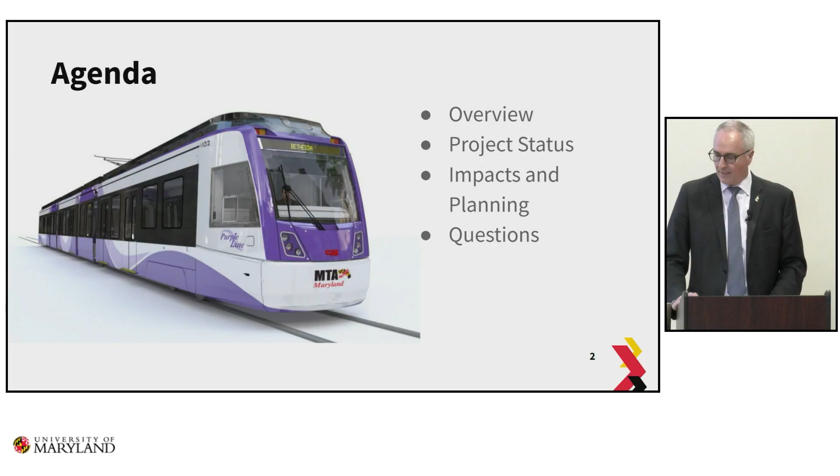Our agenda is going to provide a brief overview. I know many of you are versed in the Purple Line, but I don't want to take anything for granted, so we'll provide an overview, and then talk about the project status that's underway, and importantly, the impacts and the planning around that. And then, as I said, we'll leave time for questions.

So, in a nutshell, what is the Purple Line? It's a 16-mile light rail train system that will connect from New Carrollton on the eastern side of the 16-mile transit corridor through College Park, through Silver Spring, to Bethesda. It's going to be operated by the Maryland Transit Administration, and the system is scheduled to be operational for service in the fall of '26.

Light rail projects like this, often the construction is finished sometime in advance to allow all the training and testing that goes on. So hopefully the construction, the major construction at least, will be finished—we'll get into some of that detail later in the presentation—but hopefully the major construction you'll see on the main campus will be finished sooner than that.

The project started in 2017, and because of some disputes between the contractor and MTA, COVID, and other issues, the project was delayed a bit, but now, as you can see if you walked into this building, it's back on track. See what I did there with 'on track'? And the MTA is optimistic about its completion for service in '26.

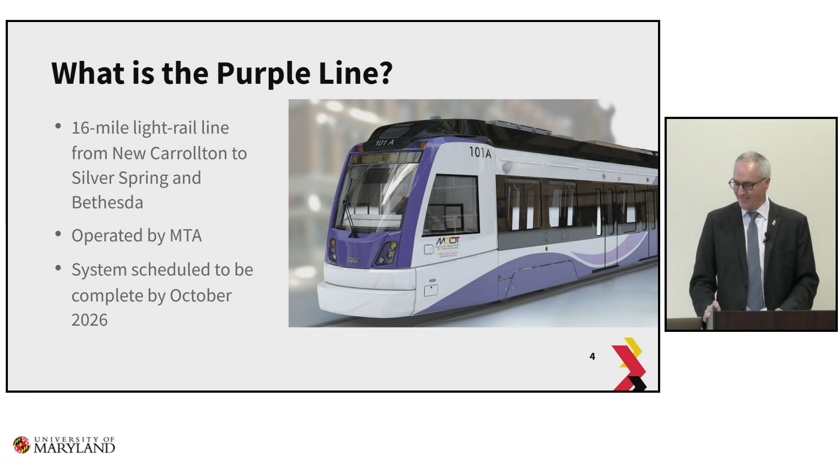You can see behind me an example. For those of you who've not had the pleasure of being in cities that have light rail, this is some video from Portland State University, where light rail has been in service for a number of years. Light rail is very quiet.

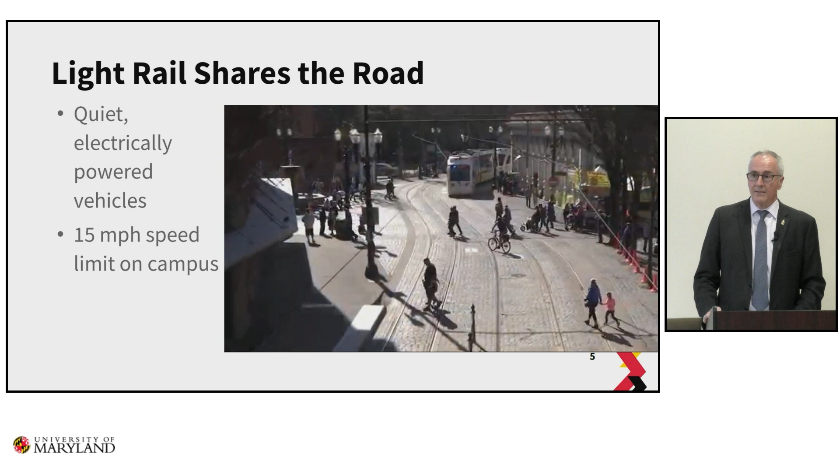Maybe not quite as quiet as this video, but pretty quiet. And they're electrically powered—as you can see, there's a catenary above the light rail itself. So unlike the metro system, which is a heavy rail system with a third rail next to the tracks, this is powered overhead. Through our campus, the speed will be limited to 15 miles an hour.

One of the things we worked through with MTA years ago was to minimize both vibration and electromagnetic interference that comes from large masses of steel moving through space. If you keep the speed down, that reduces the vibration and electromagnetic interference, and it also adds to the safety. You can see in the image that the rail in this location is embedded in the roadway itself, and that's the same condition you'll see on our campus.

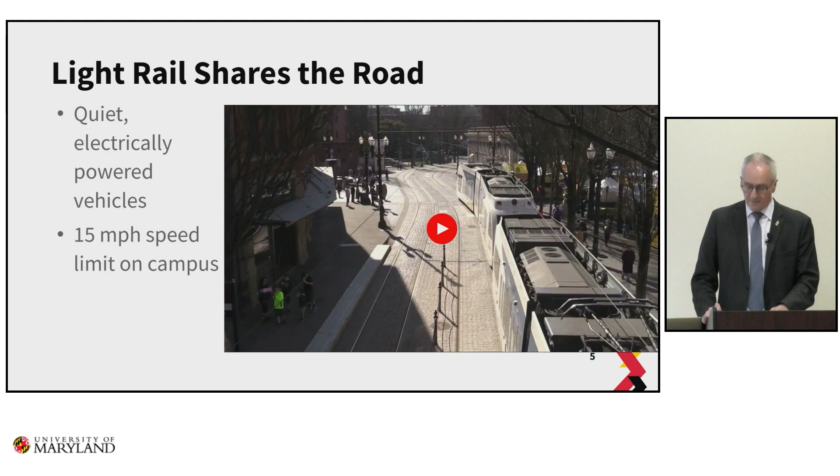There are, I believe, as many as 40 systems in the United States identified as light rail systems. You've got a few images here of some that are in operation.

On your left-hand side is the Tucson Sun Link that serves the University of Arizona and the Banner University Medical Center. Portland we saw just a few minutes ago up in the upper right-hand side. And at Minnesota, the Minneapolis-St. Paul light rail runs through the University of Minnesota's East Bank campus. So all of these are in fairly dense, urbanized areas.

Let me ask a show of hands. Has anybody been to Washington, D.C., H Street corridor to see the light rail there? Anybody else? Yeah, so our train is a little bit longer than that, but it's a similar looking train.

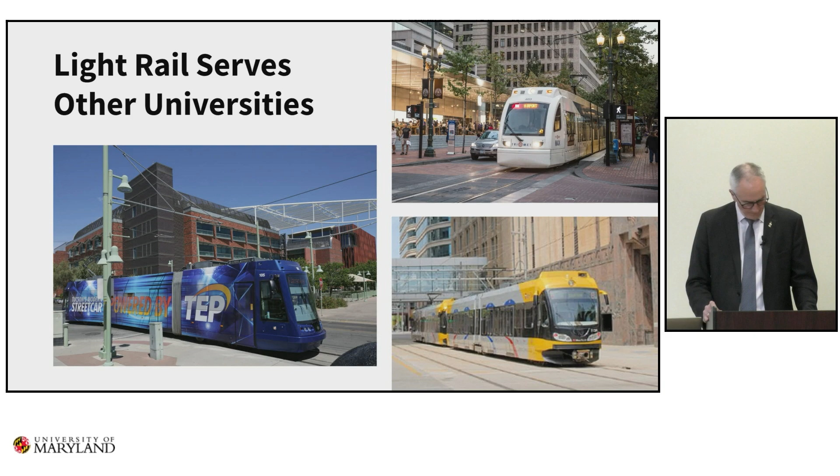When constructed and operational, there's an incredible amount of connectivity that we will have among public train transportation through our region. We're already very well situated as the flagship university within the Washington, D.C. Beltway, and we have pretty good access to the College Park Metro Station. You can see here an amalgamated image where you'll recognize parts of it from the WMATA heavy rail system with the red line that makes a U shape, and then the green and yellow line that goes through College Park, and off to your right-hand side, the orange line.

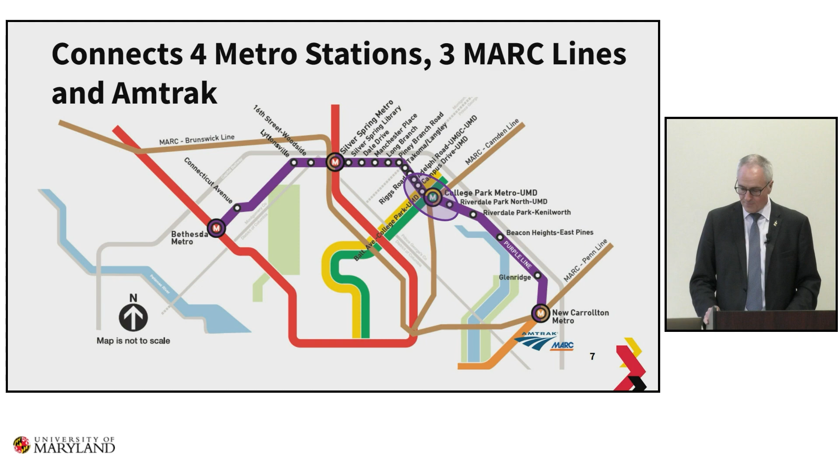The purple line will connect from east to west, 16 miles, 21 stations, and you can then easily get to all 5 of those lines directly from campus. Additionally, there are 3 commuter rail lines connected here that you can see in brown. And then finally, Amtrak. The Northeast Corridor is served by Amtrak through New Carrollton. So the ability to easily jump on the light rail, purple line, and get to other major modes of rail transportation is going to be tremendous.

As you traverse to the right, heading east, just outside this building in front of the Driscoll Center will be the next station. Then at the intersection of Baltimore Avenue and Rossborough Lane, near Ritchie Coliseum, will be the 3rd station. The 4th station is coincident with the College Park Metro Station. And finally, at the eastern edge of our Discovery District in Riverdale Park is the 5th station.

So this is a tremendous amount of easy access between these 5 stations. One of the things we were able to work out with MTA years ago is for anyone affiliated with the University of Maryland community to ride among those 5 stations fare-free. This is going to be tremendously beneficial to our entire community, particularly as we continue to develop areas to the east in the Discovery District.

People ask, well, why is the light rail right through the middle of the campus? The simple answer is that a great number of alignments were explored for many, many years, and the best practice for transportation is to put the transportation where the people are. Most of our folks are right here through the middle of the campus. You can see on this image some of the many major buildings along the alignment of the purple line that will be well served.

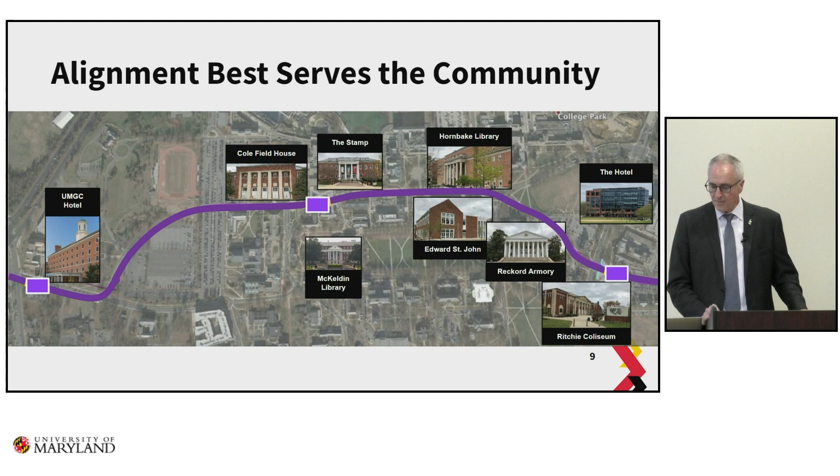Now we're drilling down on the 3 stations between Baltimore Avenue and Adelphi Road. This is the path that serves the community the best.

I mentioned a little bit already about some of the benefits of the light rail system, the free rides. While the Purple Line is being constructed, we also worked with MTA to add a bikeway, a two-direction bikeway, 10-foot wide, on the south side of the Purple Line between Adelphi Road and Baltimore Avenue. Many of you who like to bike, some of you may like to scooter, will realize that our bike infrastructure on campus is not where we would like it to be. When the Purple Line is constructed, as part of the construction effort, this nearly 1.2-mile bikeway east to west will provide a major bike and scooter pathway that will be separated from sidewalks and separated from roadways.

So this will be a dedicated bikeway.

I mentioned the access to the campus from the surrounding areas being greatly enhanced by the Purple Line when it's operational, as well as being able to support the continued redevelopment in and around the College Park area.

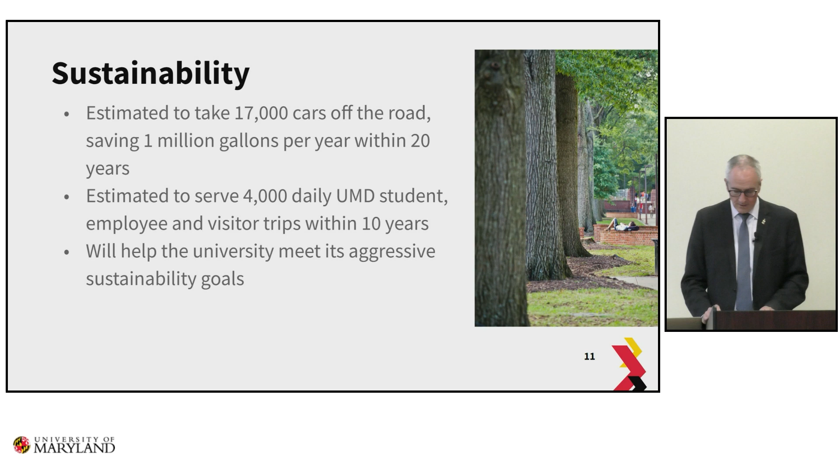Sustainability is, of course, very important to the university community, and the light rail, when completed, is estimated to take 17,000 cars off the roadways, saving 1 million gallons of fuel every year within the first 20 years of operation. What it means to the university campus is about 4,000 daily UMD student, employee, and visitor trips. This is just part of our sustainability efforts to reduce our impact. Transportation is a major contributor to greenhouse gas emissions, and having light rail will enable us to make significant progress at reducing that impact.

The vehicles themselves are very sleek. They're actually fabricated and sitting in Elmira, New York, maybe a year away from the first of those vehicles making its way to the test area, not far from the campus. They are a single vehicle, 140 feet in length, and you can see the accordion strips connecting the 5 sections of the vehicle. That's called articulated, and that articulation enables the long vehicle to navigate turns and deal with grade changes.

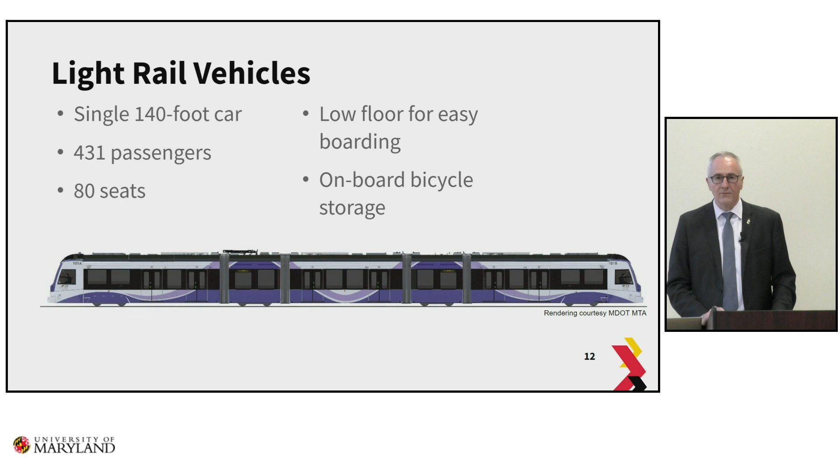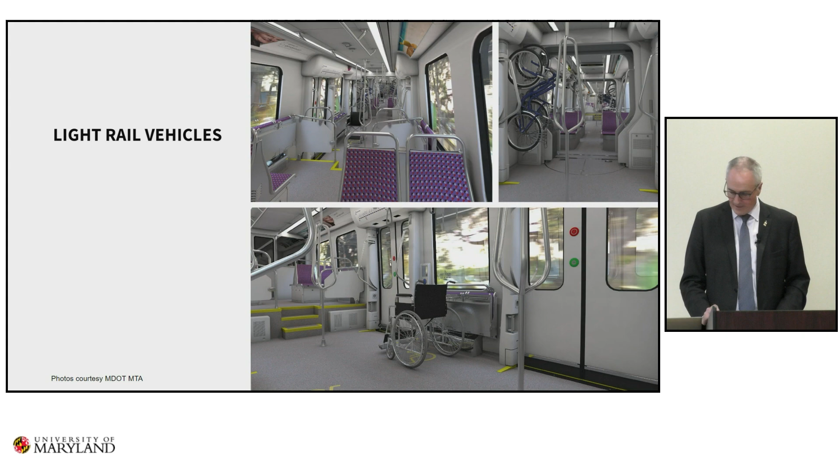The capacity on board is 431, including 80 seats. It's a very modern train. For those who've seen older style light rail, rest assured this is a very contemporary train design with low floor for easy boarding. You'll see in the next image on-vehicle bike storage and easy access for those in wheelchairs. So very modern, clean, I'd say very attractive train.

Additionally, we're going to have public art at each of the light rail stations across the 21 stations, including the 5 near campus. The Purple Line has an Art-in-Transit program, which I really applaud, that resulted in a series of unique art installations at each of the stations.

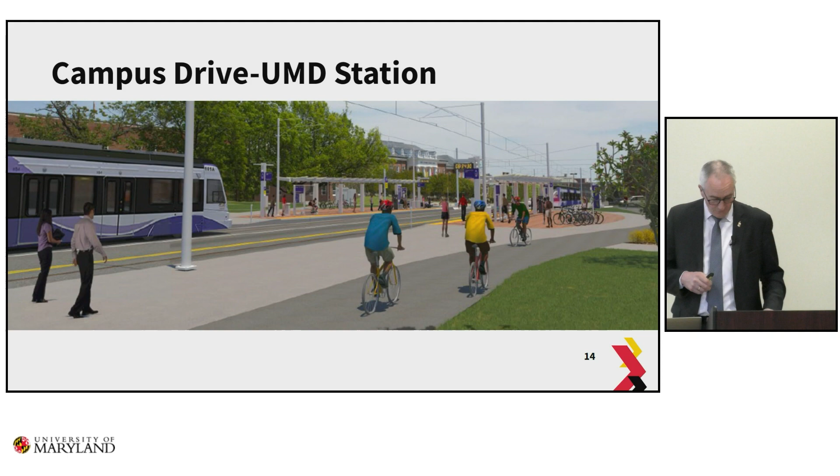Here's the bikeway that I described, and you can see the shelters for the station here in the center of the campus. The shelter itself is very clean and easy to see through. On the next page, I'll show you some of the images of each of the stations on those 5 locations I've been talking about.

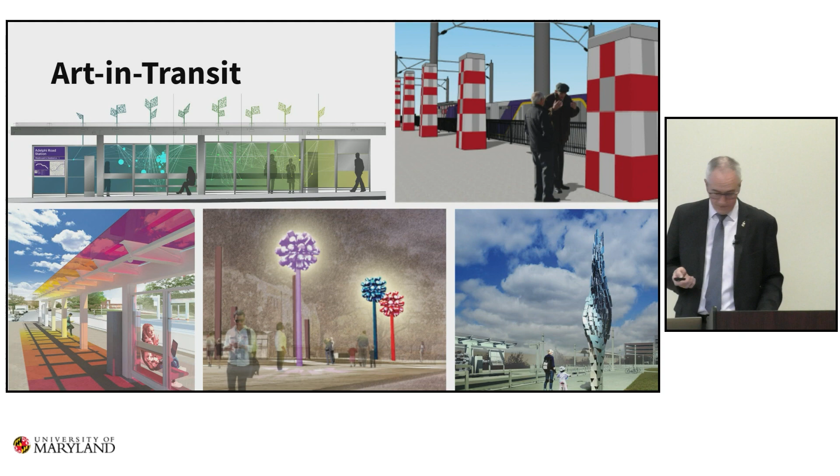Regarding status, I mentioned a little bit, but I'll go into a little more detail. The project got started some years ago, but really it was utility relocations and modest amounts of work. Things started in earnest again over this past winter break, and as you can see now, the contractor, MTS, is fully mobilized and well underway.

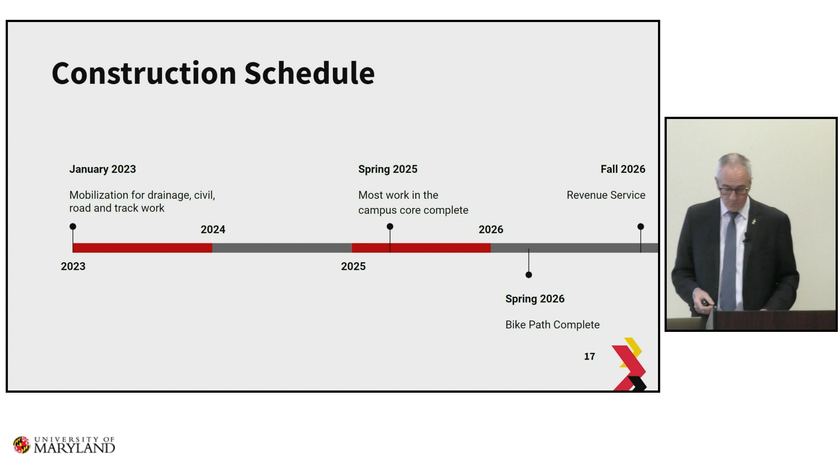Things will be working pretty heavy. I'll get into some details in just a second, but most of the work in the campus core is projected to be complete by spring of 25. We're working with MTA to try and even improve upon that schedule. The bikeway I mentioned will finish shortly thereafter, and then revenue service, the term used when it's available to the public, is scheduled for fall of 26.

So managing the impacts during construction is a significant responsibility, and we've been working at it very hard for a number of years. In addition to working very closely with MTA and the contractors, we have created two leadership groups. These were created years ago, one that I chair and one that Courtney Brown chairs.

The one that I chair we dubbed the Purple Line Executive Oversight Group, and that's the group that at a high level oversees the construction and works to minimize the impact on campus operations. They're also a key group that shares concerns from the community, which they hear from different quarters.

Courtney's group, the Purple Line Work Group, is about 30 stakeholders spread across the campus, and they deal with lots of the nuts and bolts, day-to-day operational issues.

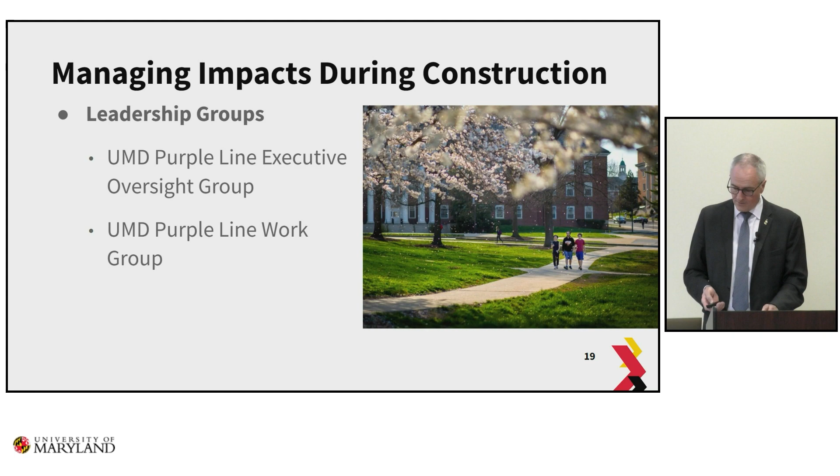Campus Drive is one way from Regents, the north-south road here, through to in front of Cole Fieldhouse. It's been in a one-way condition for some time now. What's changed recently is this stretch of roadway between Union Lane and in front of Cole is one way, and between that location and the Lot 1, Lot Z parking lot, it's closed. We're trying to balance minimizing the impact to the campus while allowing the contractor lots of work areas so they can progress the work as fast as they can. This is the condition that will continue through the rest of this spring semester.

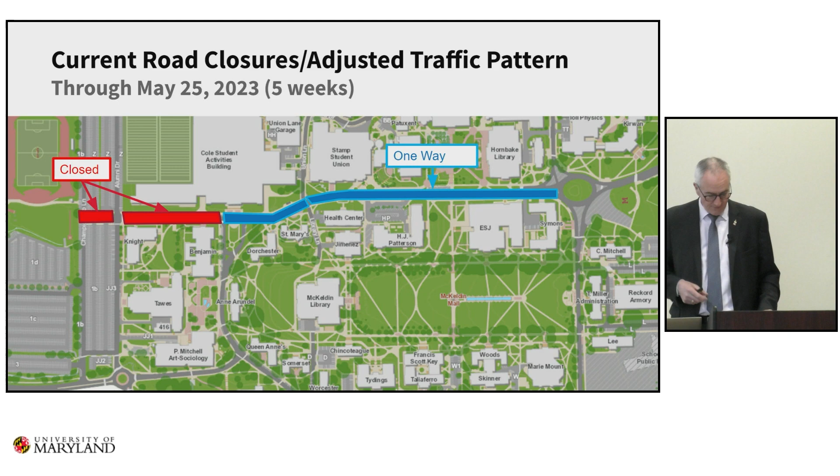Part of that was to reconfigure the intersection at the traffic circle. Just to orient you a little bit — Toll Physics is here, Hornbake Library, the Geology Building, Symons Hall. So the former traffic circle at Campus Drive and Regents Drive has been reconfigured with a series of stop signs to allow the work to go on, because the Purple Line itself will come right through, and I'll show you an image of that in just a little bit. We've had to do these detours to allow the work to continue, and it should be in this condition until about September of this year.

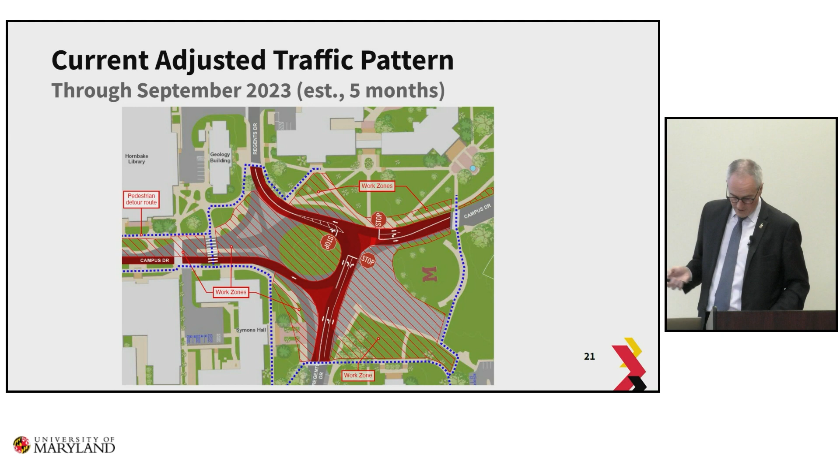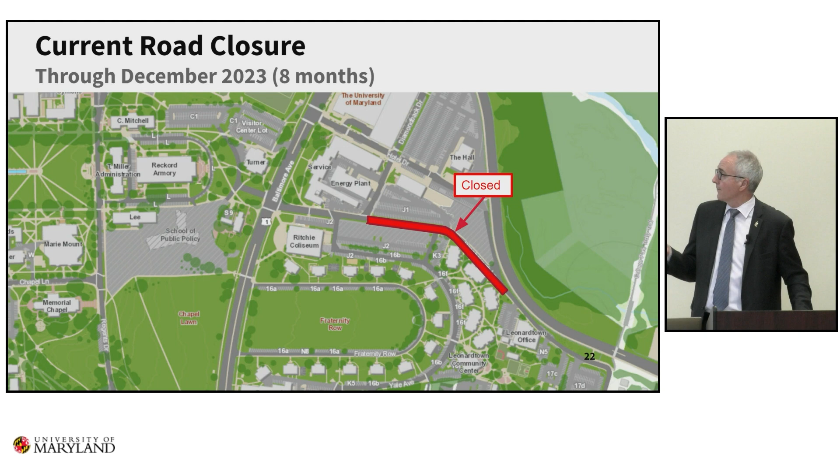Then through the rest of the calendar year on the east side of campus — I don't know how many of you spend time over there now — near the hotel and Ritchie Coliseum, the section of Rossborough Lane adjacent to the new Leonardtown community is closed. Ultimately, the Purple Line will make its way across Rossborough Lane and connect to Campus Drive, continuing toward the College Park Metro. So this is another 8 months in this condition.

When we return after summer, hopefully soon after, this intersection—I apologize we don't have the same graphic image underlying this—but this is the Campus Drive, Regents Drive intersection. This is where the traffic circle used to be, and here is where the landscaped M currently exists.

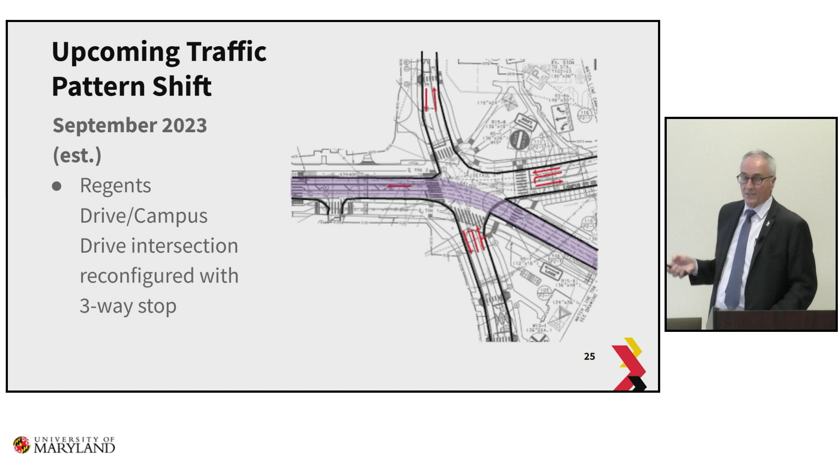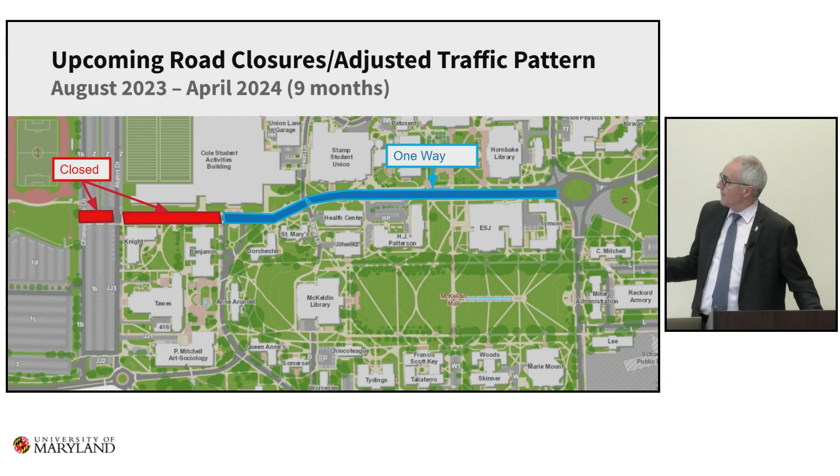And then in the fall, we'll be back essentially in the core of the campus in the same condition as today, with one-way traffic from Regents—this will have been improved through—and then this section remaining closed.

In January, now I'm going to flip back over to the eastern edge. You may recall that we had closed this section—this section of Rossborough Lane is closed right now for construction. As they finish that up, construction will move into this section.

What will happen here is there's a period of about 11 months where access through Rossborough Lane is not going to be permitted. We have designed and will have constructed a connection between Lot C1, near the old visitor center, to allow moving around this intersection without going through Rossborough Lane.

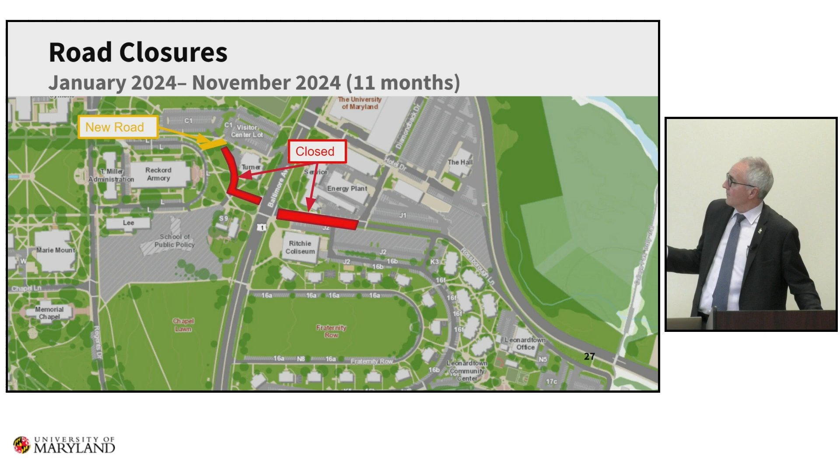So the section right behind Turner and between Ritchie and the service building will be closed for that 11-month period of time.

All right, so a lot to sort of work around. I'm going to talk a little bit about the sidewalk closures, which I'm sure everybody in this room has probably already experienced.

Just a couple of points: we work very hard to make sure that all of the detours are ADA accessible, and we develop work plans with the contractor that are reviewed with our friends in the accessibility office. But in addition to planning this work, construction is a dynamic activity, so there's a group of folks who monitor on a regular basis to make sure that what we think is an accessible and well-marked pathway remains that way through construction.

Later on, I'm going to point you to an email and websites where, if you were to learn that something is not how it should be, let us know and we'll get on that right away. We do take this very, very seriously. We work very hard to provide good signage, good notice, and stay on it day to day to make sure it stays that way.

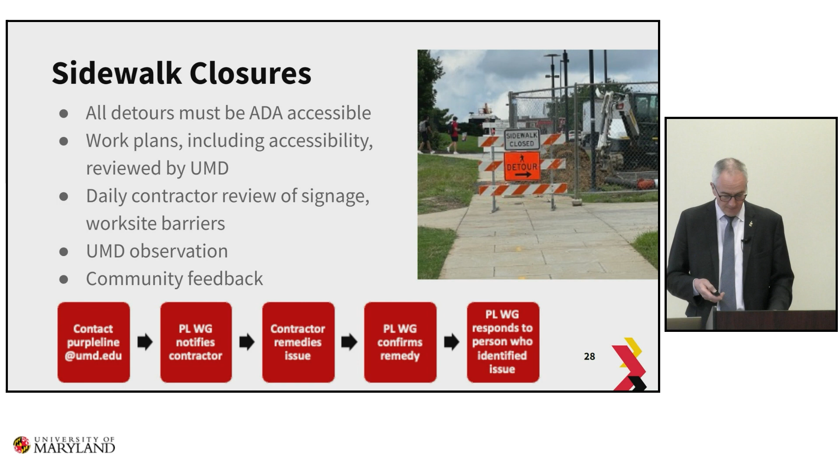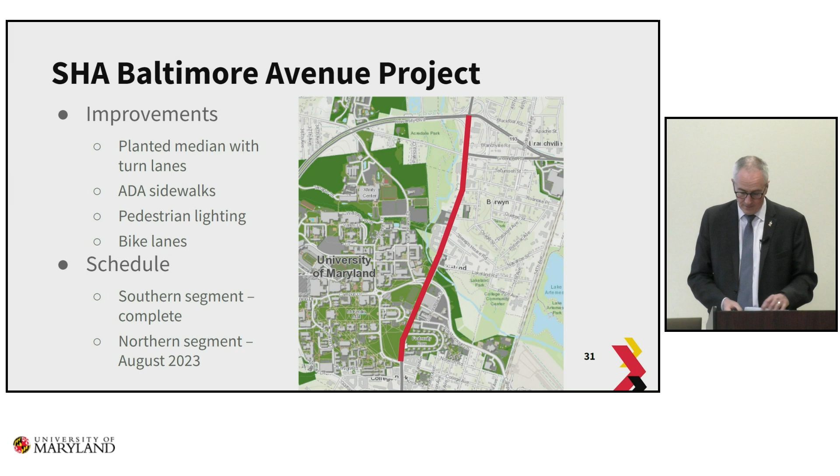State Highway is indicating at this point that the scheduled completion is in August of 2023. If you ride around that roadway, you probably think that's ambitious, and I would agree with you. So we're working with State Highway and our friends at Maryland Department of Transportation to bring attention here as well as to the Purple Line.